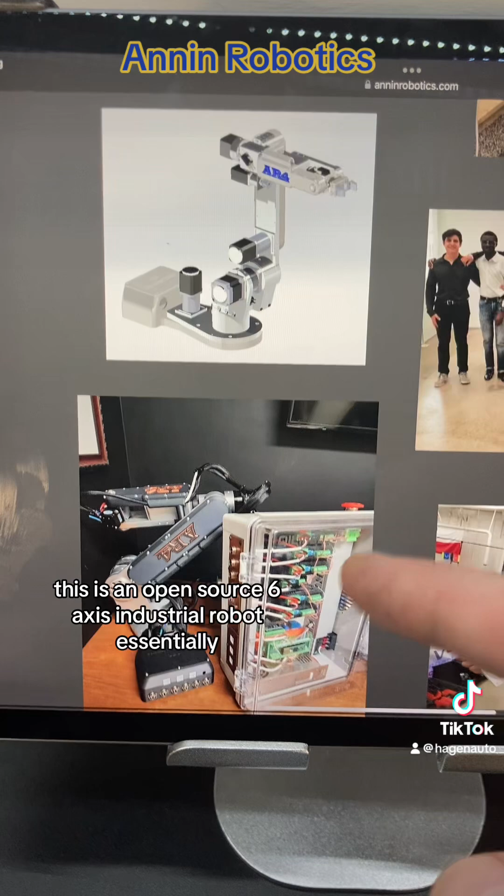A little while ago, I was asked to give my thoughts on the Annin Robotics DIY open source robot project. This is a project which has been going on for a few years now. It's an open source 6-axis industrial robot essentially, but a very DIY entry-level version.

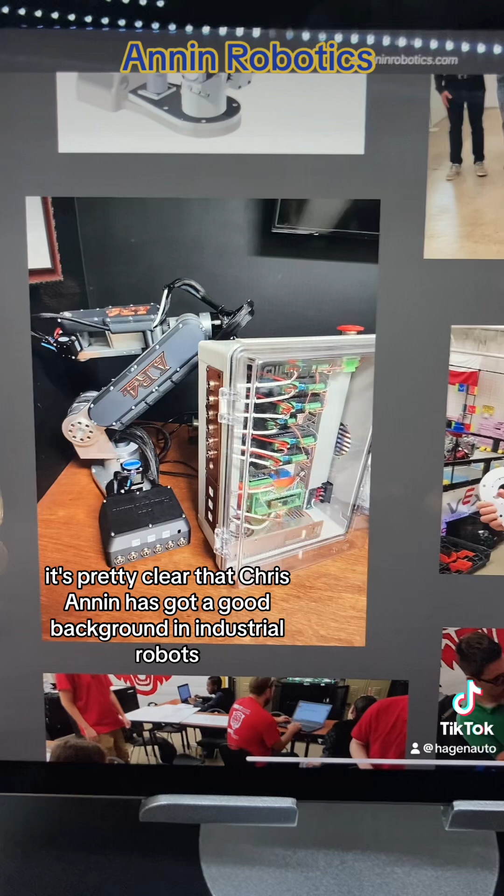It's actually really well done. It's pretty clear that Chris Annin's got a good background in industrial robots, and that really comes across in this thing. To give some idea of background for me, I've spent 20 plus years dealing with industrial robots from ABB, KUKA, Fanuc, Motoman, Kawasaki, Universal Robots, and a few others.

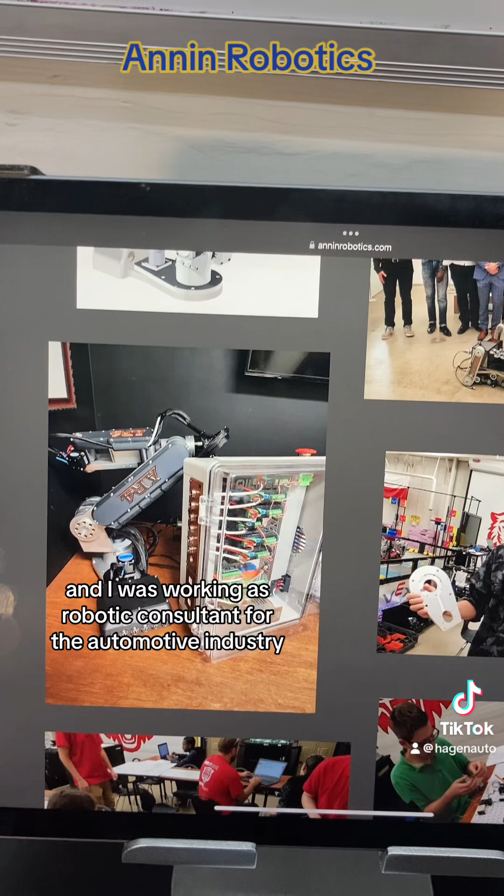I was working as a robotics consultant for the automotive industry, for investment firms, and I've worked with robot startups, including a few in the UK, in Switzerland and in the States, before I got into 3D printing and lubrication.

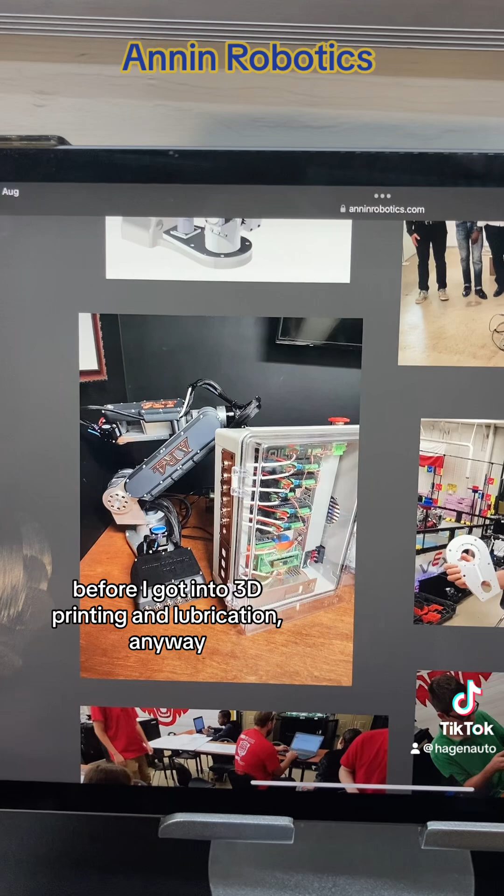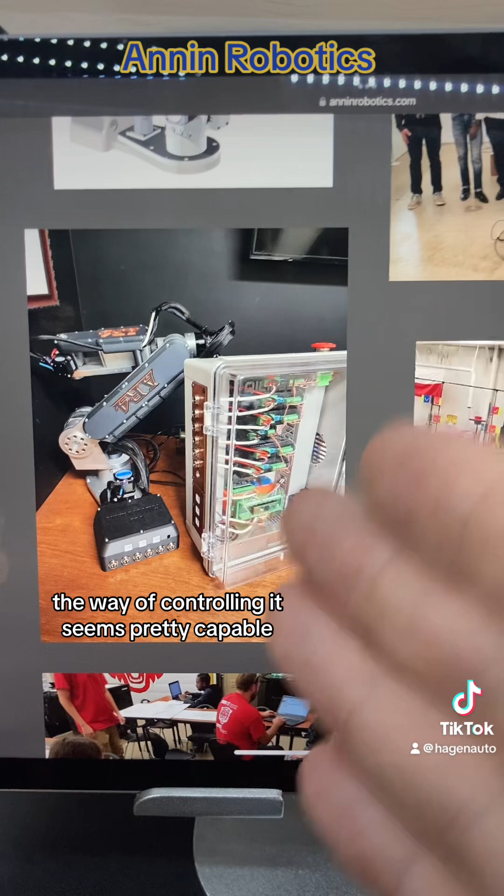Anyway, my general thoughts on this is that it's very, very good. Generally, the structure's pretty good. The way of controlling it seems pretty capable. So let's have a look at the positives.

Programming is really good. The fact it's open source, the fact it's good value - we'll have a look at that in a minute. The upgrade potential is quite good. The fact it's educational, works for proof of concepts, it's well established, so it's a project that's been going on for a little while, and probably most importantly, it's better than the competition.

I've dealt with a couple of startups at a similar sort of level to this, and this is far lower cost and is better supported.

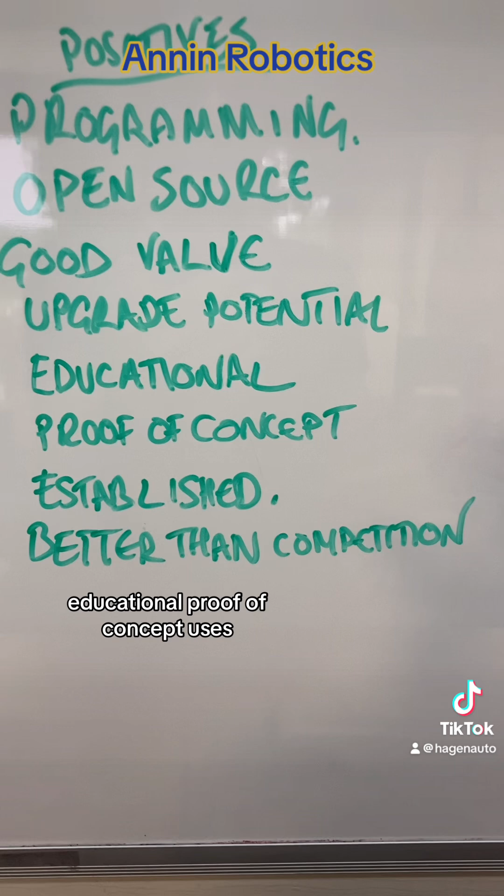But we can have a look at the negatives and why you wouldn't really want to use it beyond educational proof of concept uses. So you wouldn't really want to use it in a real world application where you're actually making parts necessarily. And that's because of the parts that you're dealing with.

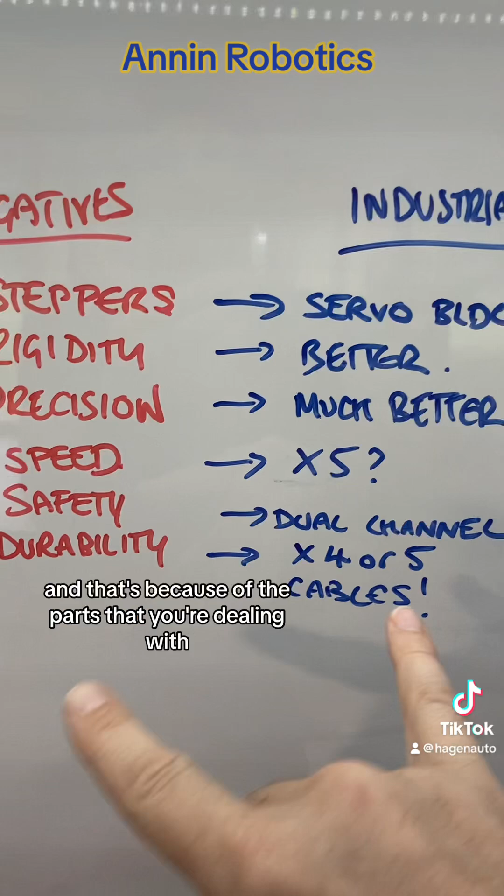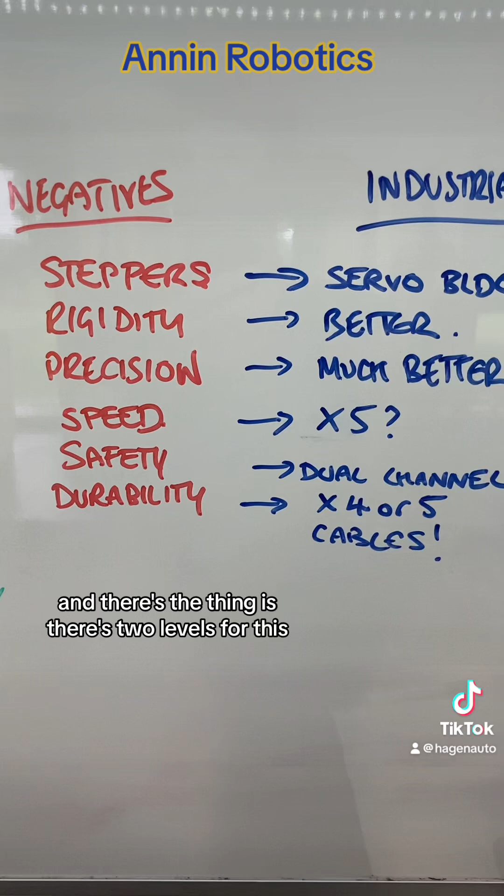So you've got stepper motors, which aren't nearly as good as a servo motor. The rigidity is not really there, and the thing is, there's two levels for this - there's a 3D printed version, or there's a metal plate version, but either way, an industrial equivalent is going to be much, much better.

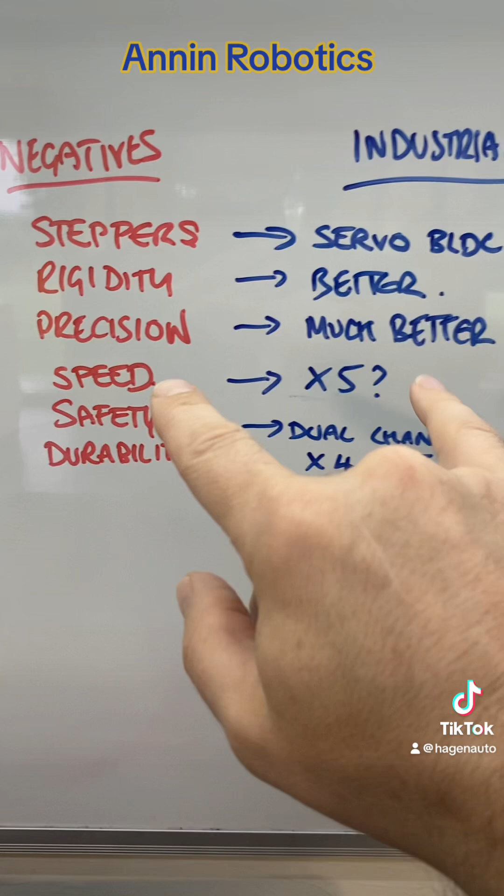Precision wise, the industrial is going to be much, much better. The gearbox backlash is not great on these.

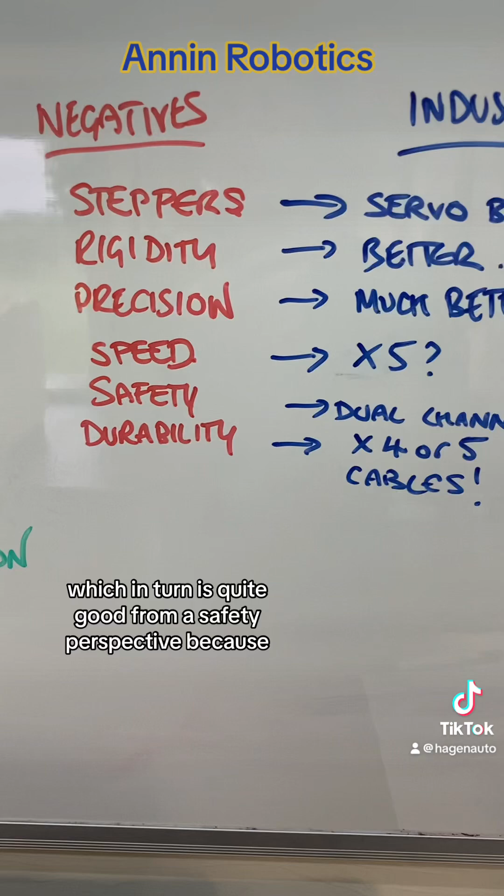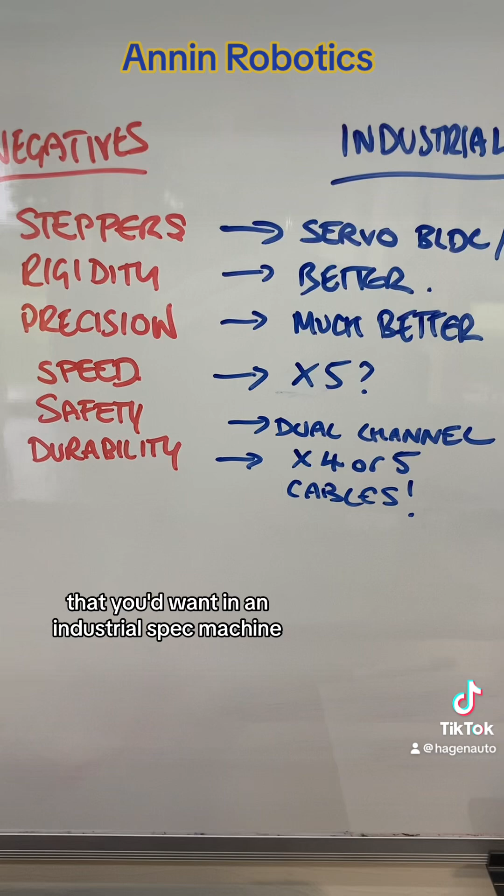Speed is going to be relatively low, which in turn is quite good from a safety perspective, because the thing's never going to be moving fast enough to really hurt anyone very much. But it hasn't got the sort of dual channel safety that you'd want in an industrial spec machine for CE marking and installation safety really.

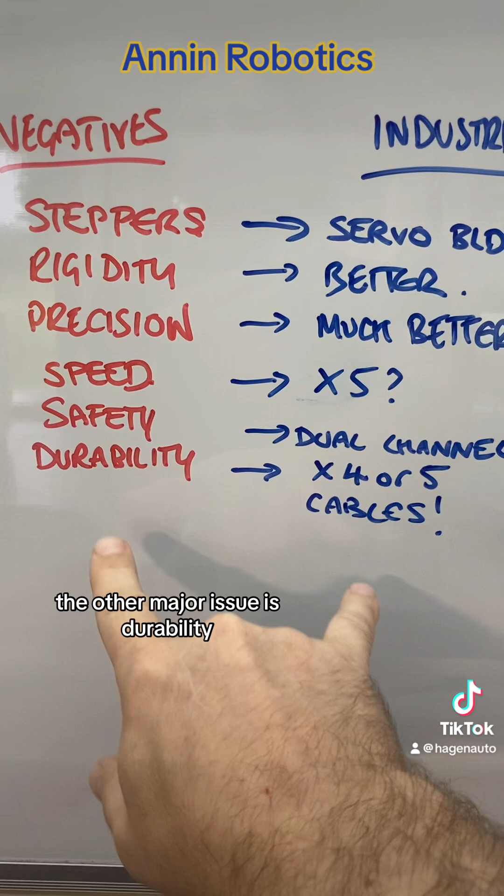So the other major issue is durability. The durability of this is reasonable, it's pretty good, but the cables especially, I suspect, are going to cause problems in the longer term.

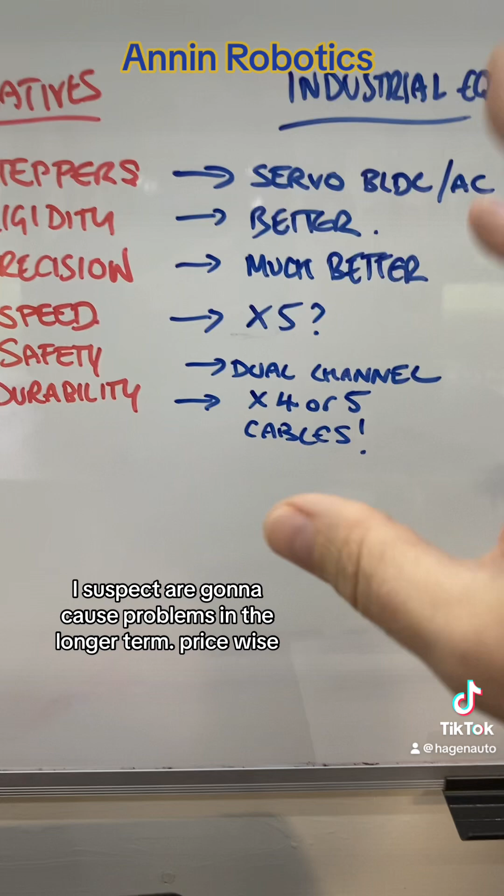Price wise, this project is quite interesting. It sort of starts at 1,000 to 2,000, and if you compare that to a used robot, it's not that much cheaper than a reasonable used robot arm.

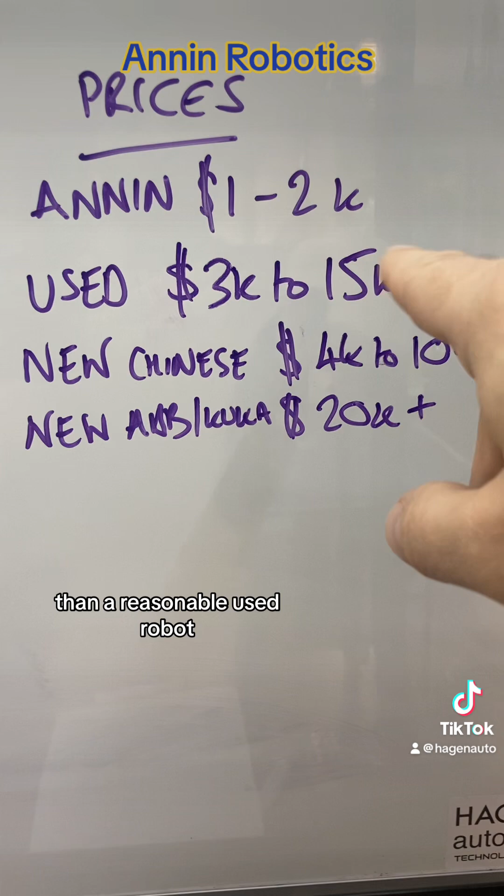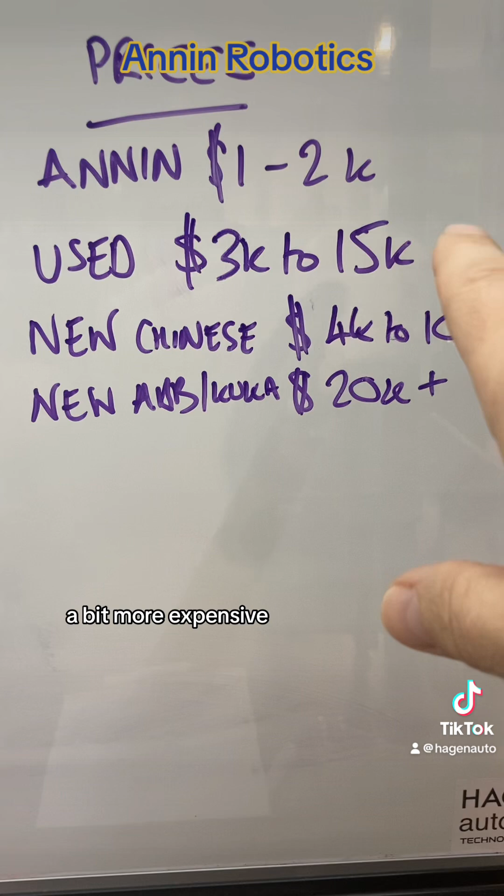It'd be harder to find one around 3K. You're probably looking at one which is quite old, but you can find them out there. A little bit of a gamble if you don't know what you're doing. A bit more expensive if you want to get one off a trusted trader with some sort of warranty.

The new Chinese machines are the real eye-opener. They've gone right down in price now, so that you can get a completely new industrial spec machine for under $5,000, which will really do you a job in a way that this just simply isn't going to.

And then you could go for the new ABB, KUKA, Universal, whatever else, but they're going to be sort of 20 grand plus. So that gives you an idea of the price.

Now, the way that the pricing works on the Annin is really quite interesting, because what they have done is split the robot up into sections. So if you look in the kits section, we basically have a kit of wires and bits and bobs, and that's the full kit, which is like $1,200, but you need the motors on top of that.

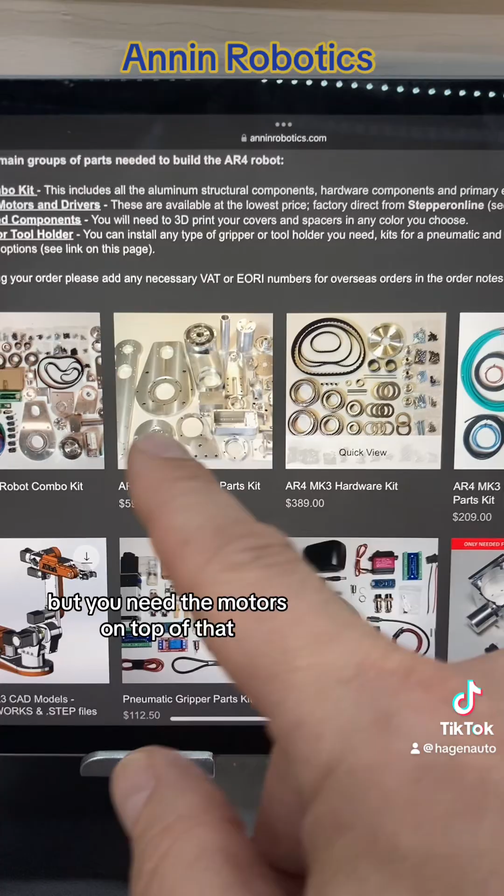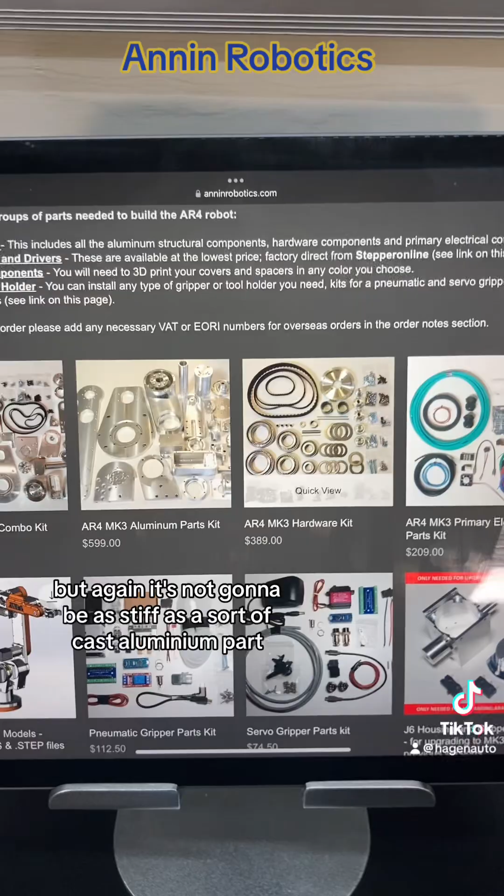You can 3D print these big plastic parts, or you can upgrade, or buy this aluminium set, which will give you more stiffness. But again, it's not going to be as stiff as a cast aluminium part or something like that, which you're going to have on an industrial machine.

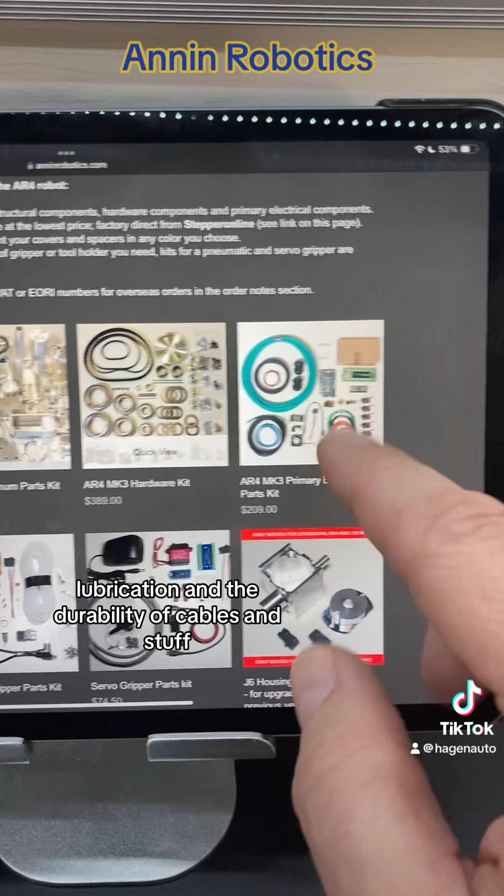So you've got hardware kits here, and again, things like lubrication and the durability of cables and stuff is the sort of thing which is probably going to cause you issues.

Now, the way it works with the servos is you basically buy this kit from here, and then you buy a complete package of stepper motors and stepper motor drivers from Stepper Online, so they've got a kind of partnership with them. And this allows them to keep the price down, because you can see you've got £600 there, which is about $800. So you're looking at, again, $2,000 all in for the complete machine.

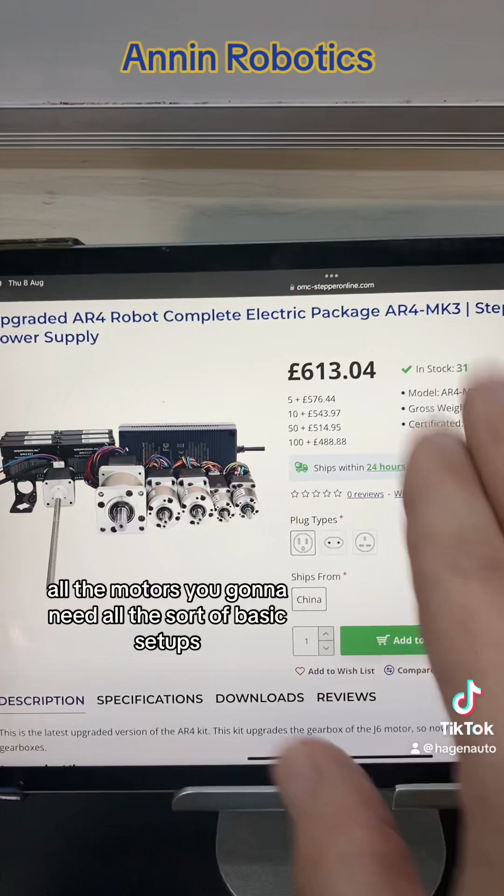And that's going to give you all the motors you're going to need, all the sort of basic setups, and obviously getting it going is not going to be that bad, because you've got a lot of documentation, a lot of how-to videos and stuff. Got a decent forum that seems lively, so all that stuff is really positive.

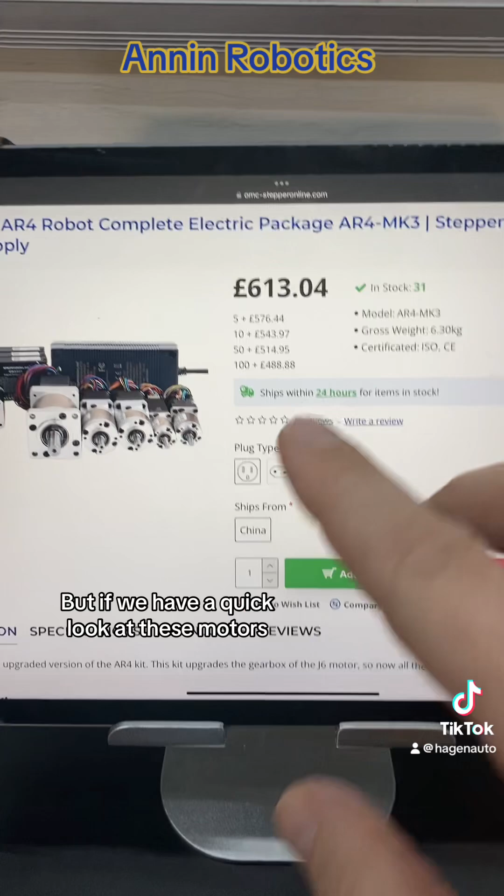But if we have a quick look at these motors, so if we look at the spec of one of them, we can kind of see where things are falling down. Now, these are closed loop motors. The gearboxes from Stepper Online are going to be pretty decent quality, and they say they're going to last a little while.

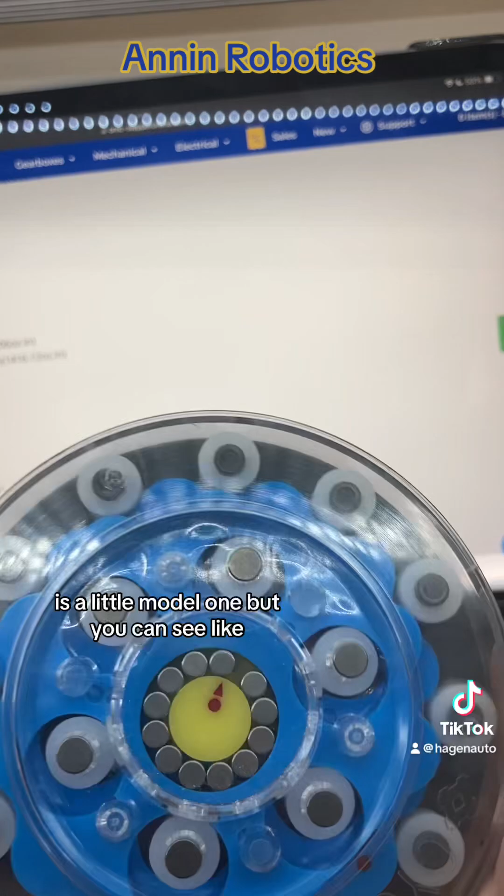Life 6,000 hours. Now, that is some way below the 30,000 hours that you can expect from a sort of cycloidal type gearbox. This is a little model one, but you can see they're a bit more intricate and require decent materials technology. They're a bit more advanced than a planetary, and you're not going to have the backlash.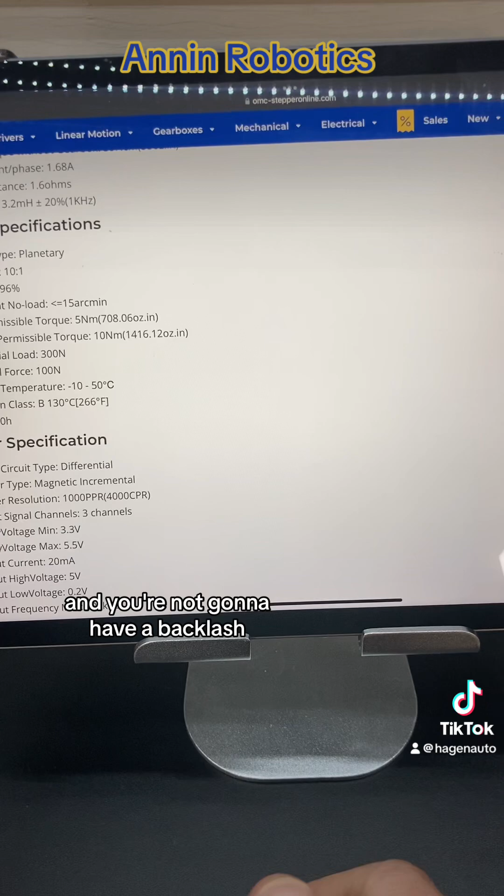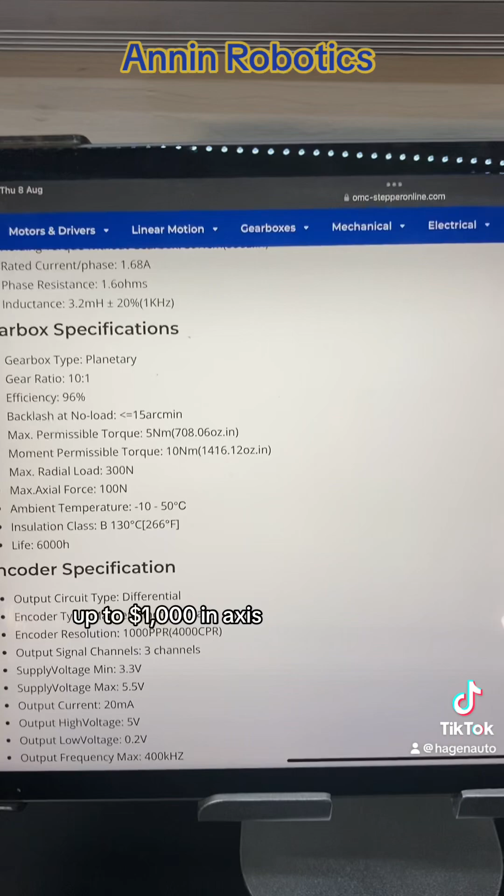The other option, strainwave gearboxes, again, they're much more expensive, usually at least a few hundred dollars an axis, up to $1,000 an axis. But that's going to give you much better backlash, and indeed a much better gear ratio, much higher, the opportunity for higher gear ratios.

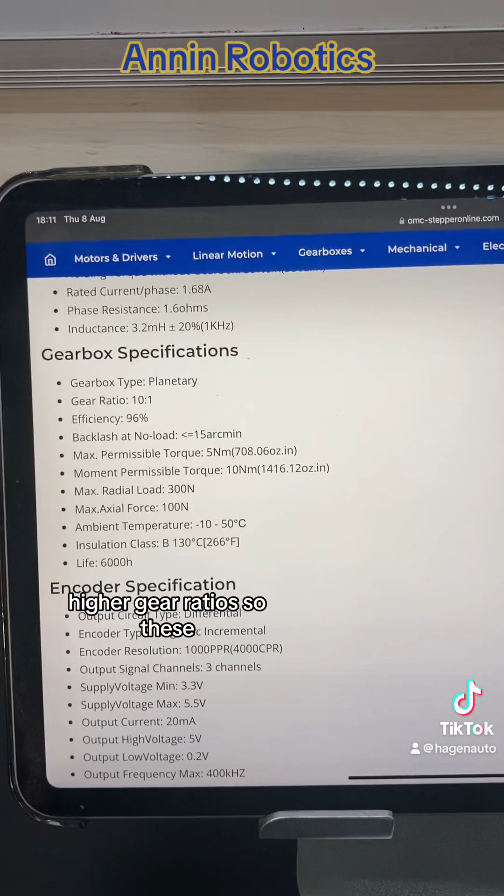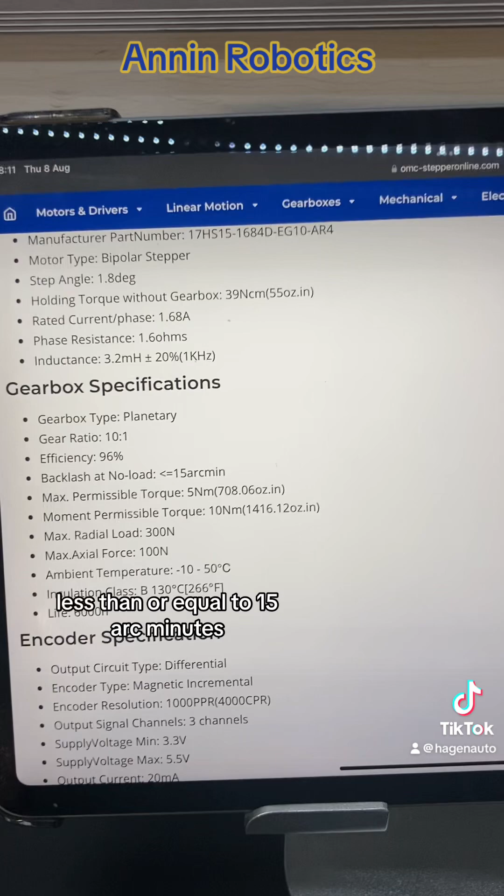So these gearboxes are planetary, and they have a backlash at no load of less than or equal to 15 arc minutes, which is pretty good, but you really want that down in single figures and really under 5 for a robot arm. And by the time you've stuck that up through the gearing, that might not be very good.

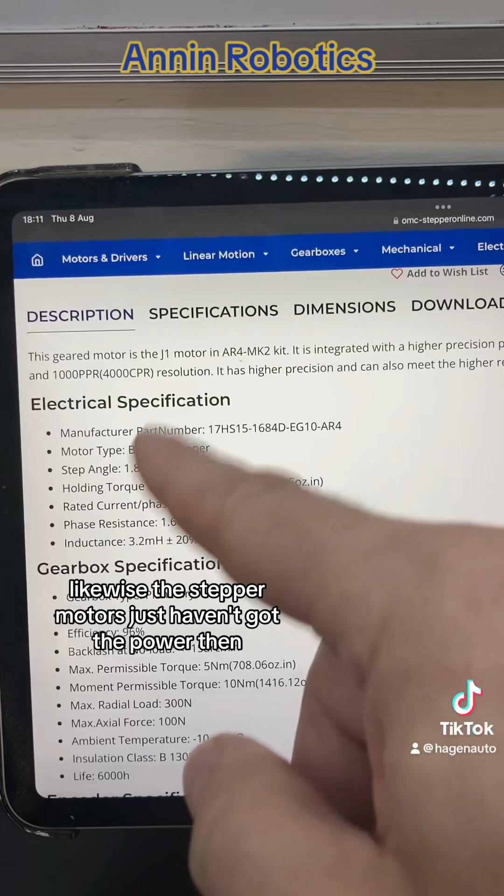Likewise, the stepper motors just haven't got the power density. They haven't got the power that you really want for the speed and all the rest of it of an industrial robot machine. So yeah, there are weaknesses here.

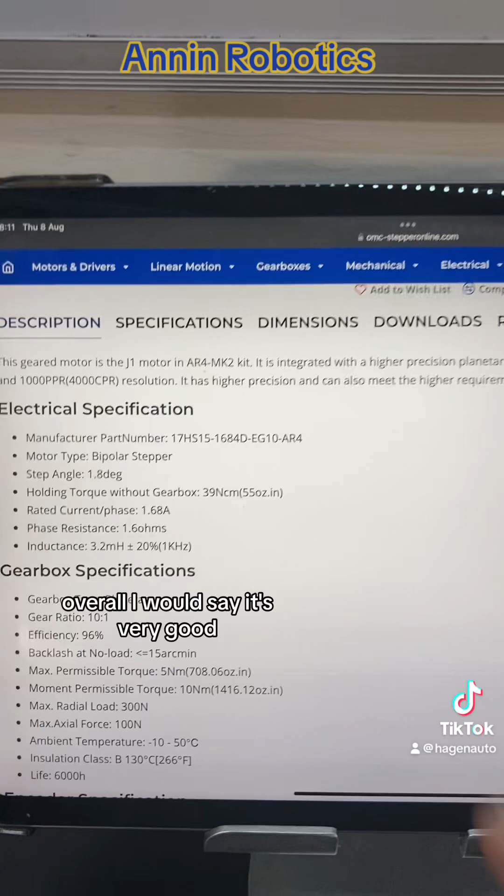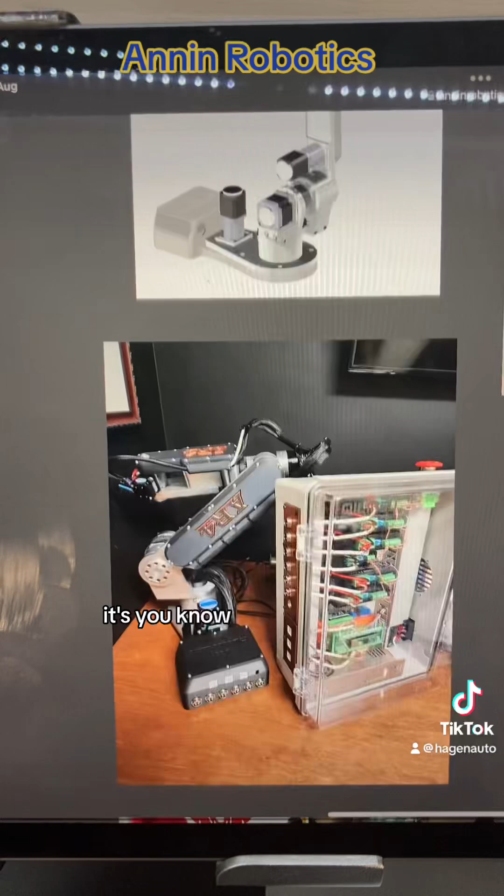Overall, I would say it's very good if you just understand the limitations of the machine. So if you understand it's a DIY project, it's entry level, it's going to teach you an awful lot. If you're a hobbyist or something like that, it's quite an interesting thing.

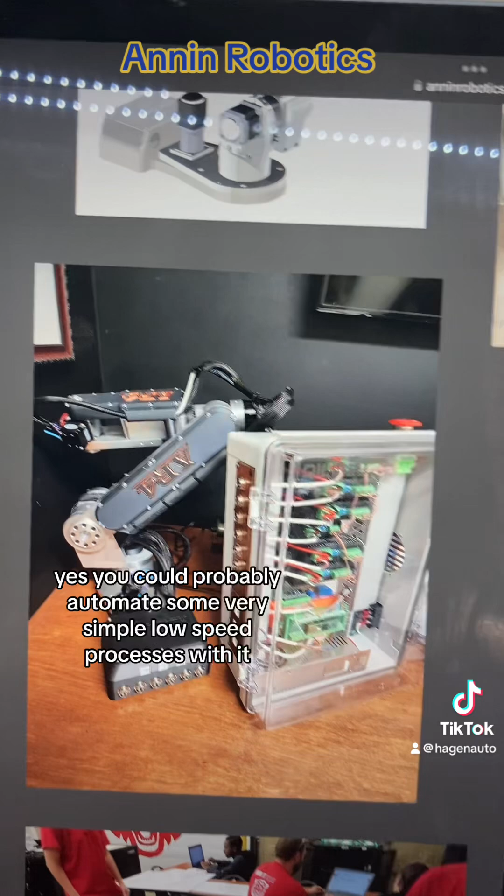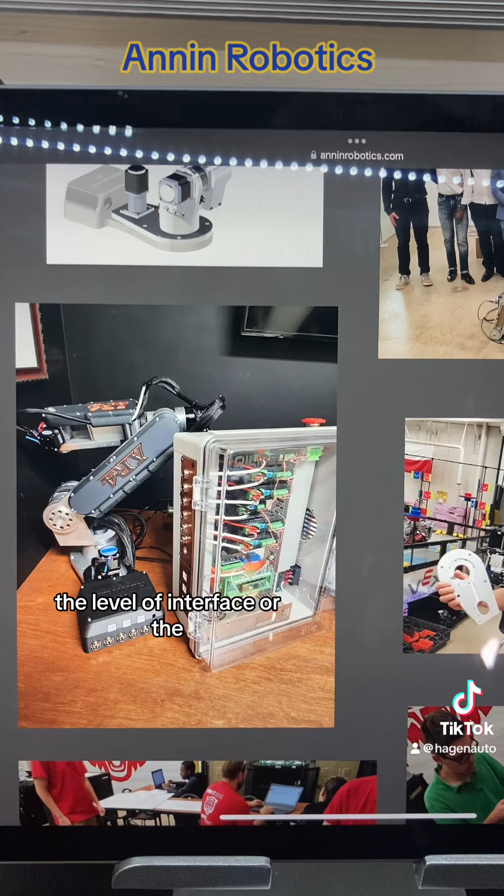Yes, you could probably automate some very simple low speed processes with it. No, you're not going to want to stick a MIG torch on the end of it and try and weld anything up. It's not anywhere near that sort of level, and it's not going to have the level of interface or the level of IO and all the rest of it that you're really going to want for an industrial machine. So yeah, that is the Annin Robotics project.

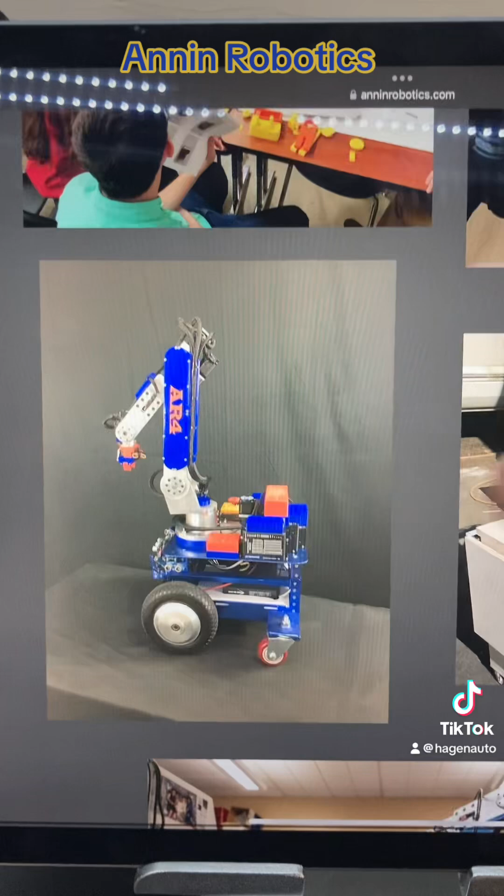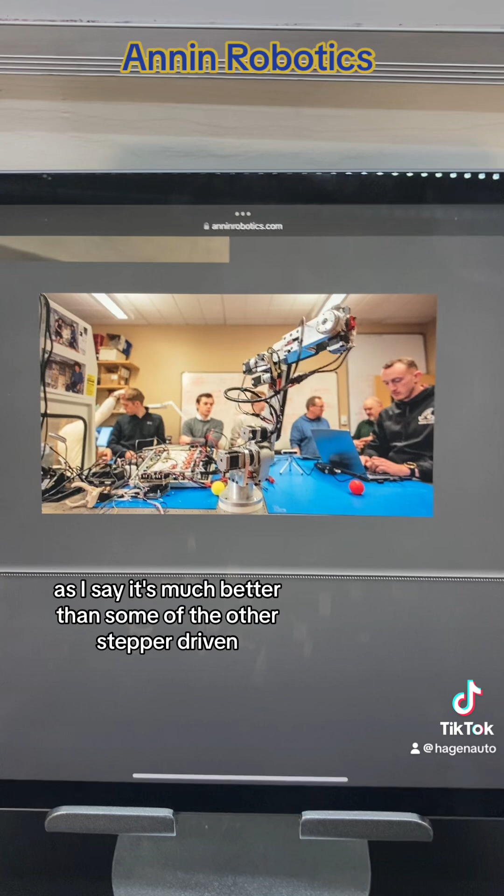Really good value, really interesting bit of kit. If it's interesting, then as I say it's much better than some of the other stepper driven robots that I've seen out there, but they too are not really on the industrial robot level. But if you're looking for something like this, then this is, yeah, not a bad option in my opinion.